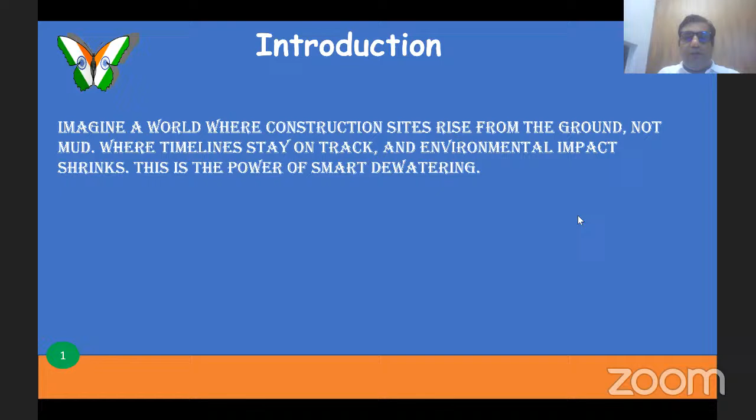With smart dewatering, less water worries translate to more peace of mind. This is the main crux of the dewatering concept. Imagine a world where construction sites rise from the ground, not mud, where timelines stay on track and environmental impact shrinks. This is the power of smart dewatering. Aligning with the words of our Honorable Chairman IEI Faridabad, smart dewatering is very much important for all of us. Today, this session is organized by IEI Faridabad in association with IEI Kolkata.

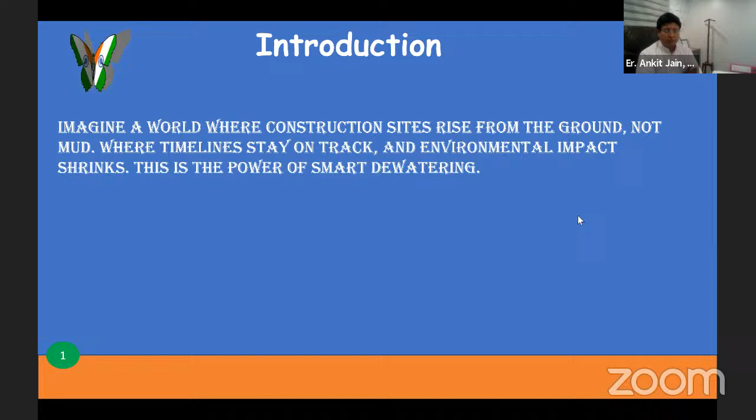Our today's speaker is Mr. Ankit Jain. He is the CEO of Cosmos, a renowned brand specializing in dewatering pumps. Holding a BTech in mechanical engineering from Jamia, Mr. Jain is a visionary leader in the field of pump manufacturing. His expertise and innovative approach have earned him the title of dewatering guru, driving excellence and technological advancement in the field. Under his guidance, Cosmos Pumps continues to deliver high-quality solutions for water management challenges, not only for the private sector but also for the corporate sectors. He is an associate member of the Institution of Engineers. Sir, Mr. Jain, welcome. Without taking a long time, please continue, sir.

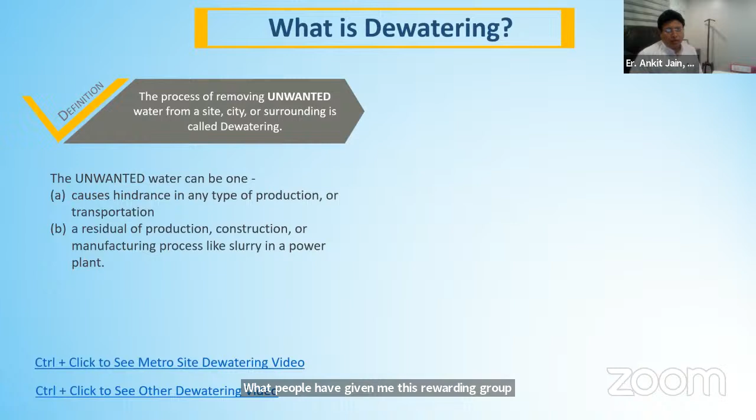So I'll straightforward come to the subject. What is dewatering?

If you read the definition, it's the process of removing any unwanted water from any site, from a city, from surroundings - dewatering. Notice the word unwanted. So we have to remove the unwanted water. Unwanted water can be a cause of hindrance to your production, to your transportation. It can be a residual of your production or construction or manufacturing process, like slurries in a power plant. So whenever there is any unwanted water, we have to remove it, and that activity is known as dewatering.

I have some small videos with me, which would give you a fair idea of what dewatering is and how it is being done in various applications. So I'll play a video for you, then I'll switch over to my presentation again.

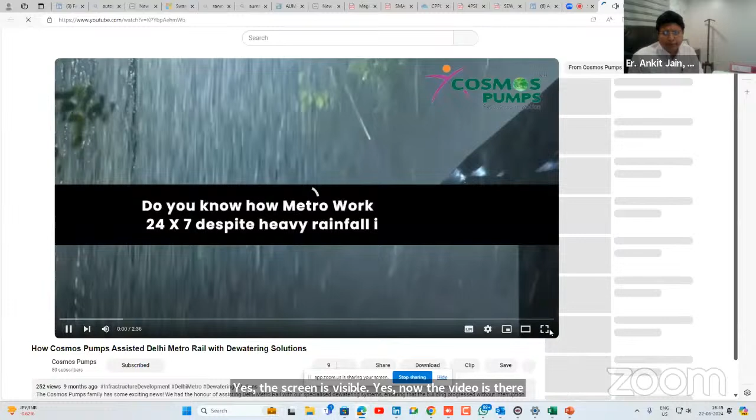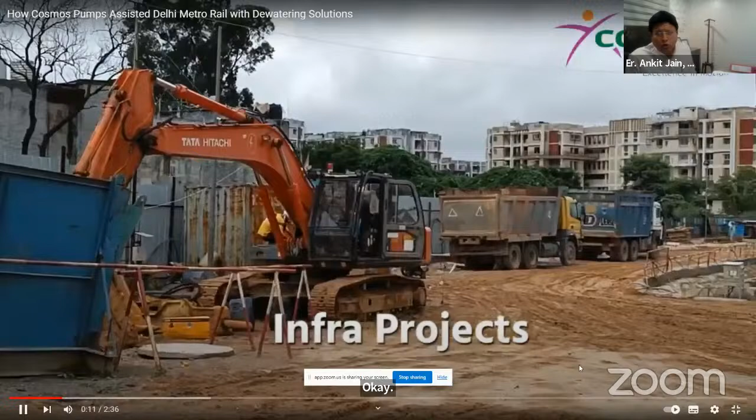My screen is visible to you now. Yes, the screen is visible now. Yes, now the video is there. Is the audio also audible? No, the audio is not coming, sir. Audio is not coming.

Share it. Okay, now it will be done. You can proceed without video, sir. At least we can go ahead.

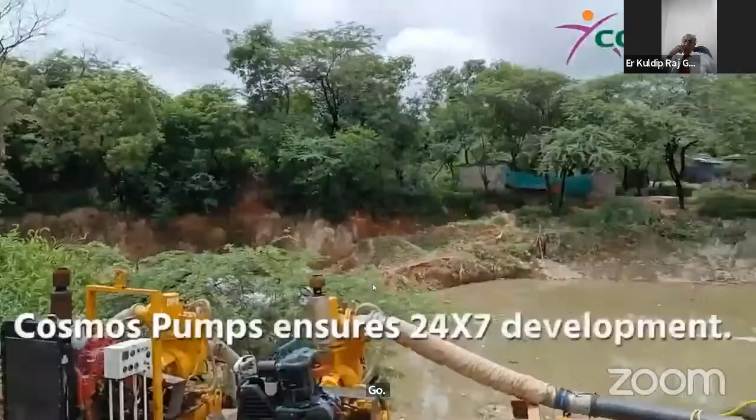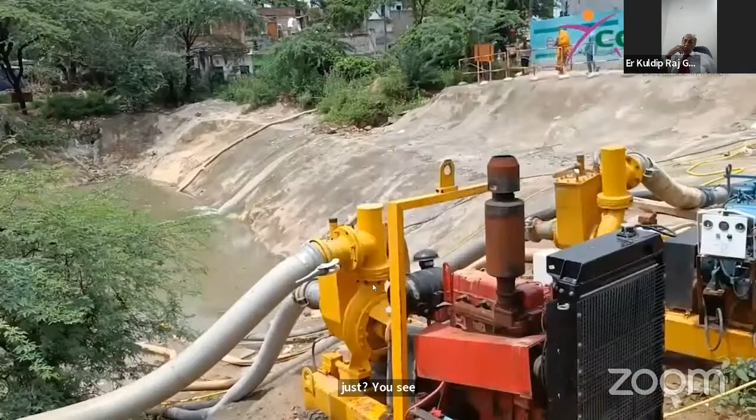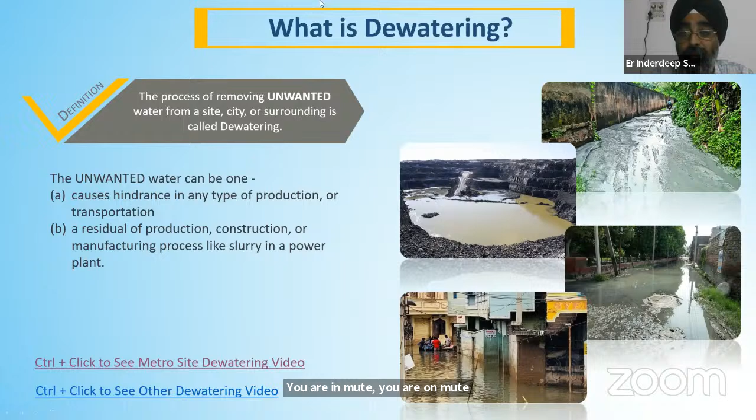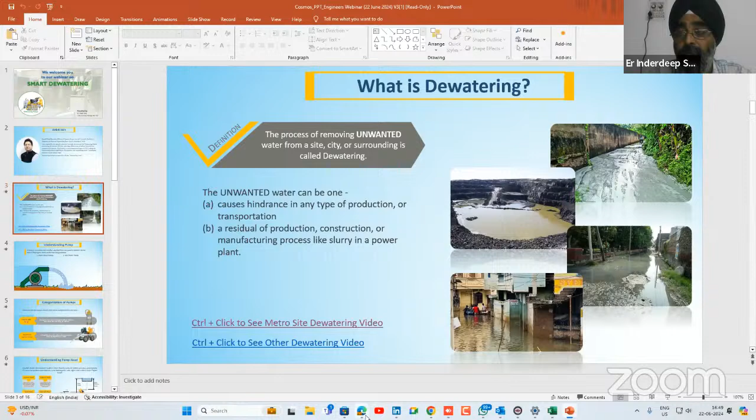You are on mute. You are on mute. Please enable your audio, sir. Yes, now your audio is okay. You can continue, sir. Okay. Yes.

So that was the video which showed how dewatering is being done on any construction site. That was the real video of the Delhi Metro construction site, which is undergoing even today itself.

These kinds of dewaterings are required not only at infra sites but also at mining sites. You can see the photograph. Dewatering is required during monsoon by municipality people, by local bodies, and by various other municipal organizations for their respective regions.

Once we understand what dewatering is, we have to understand the pump. As engineers, we know that a pump is a machine which transfers fluid from one place to another. Since water is also a fluid, we require a pump for transferring it, and that pump is the dewatering pump.

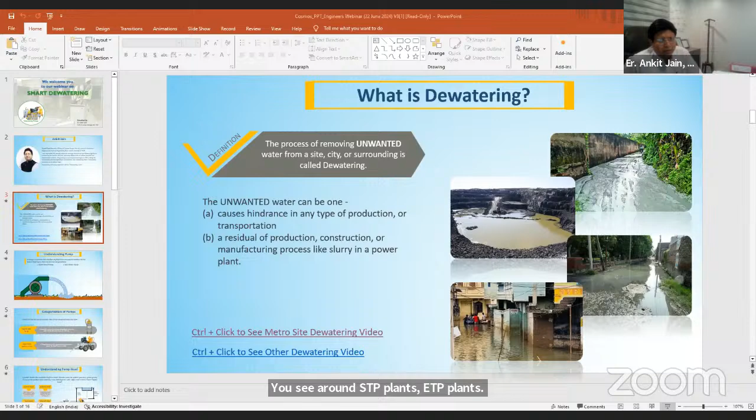You see around STP plants, ETP plants, sludge pumps, sewage pumps—they come under the category of dewatering pumps only. All municipalities, as I've already told you, any under bridges during the monsoon—everybody must have faced that during the monsoons there is a big blockage on the road because of huge water logging.

Municipalities have various other applications too, like manhole cleaning, like nala cleaning. They also use dewatering pumps there. Flood control is a big challenge for everybody.

This is a real photograph, captured 3 years back. If you know the area in Delhi, it is Badarpur, where every time you pass through this underpass, in a 2 hour rain, this underpass is full of water. So every time the local municipal people call us, and we do emergency dewatering for them.

This year we hope they should not call us—they have planned something in advance.

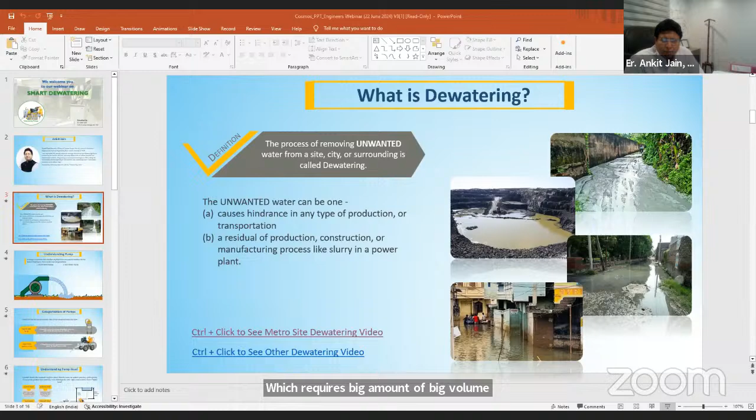The other application you can see is mining and quarry, which requires a big volume of dewatering pumps, because as you go lower while doing excavation, the head increases. Even in coal mines, the head is almost 200 plus meters.

Many of you might have seen the movie Raniganj with Akshay Kumar. In that movie, we saw that a big disaster happened just because they could not control the water. I could see that a lot of dewatering pumps Akshay Kumar was using to evacuate the water, but the challenge was they didn't install sufficient dewatering pumps to control the water, and that big mishap happened so many years back.

Even today, dewatering is a big challenge for coal mines and other open cast mines also, because if you are doing excavation, water comes from the ground and you have to keep removing the water so that the mining activity continues.

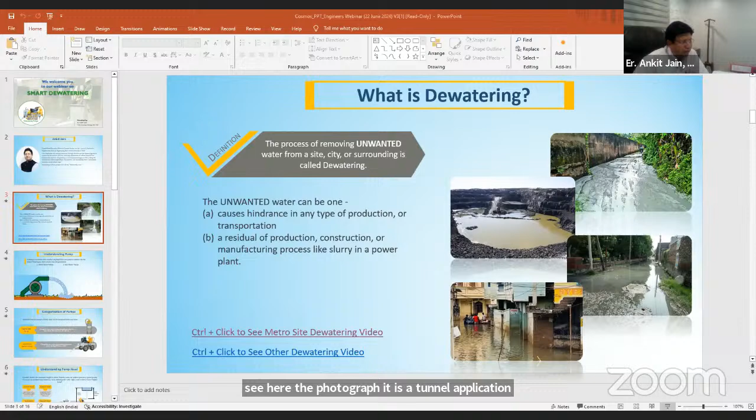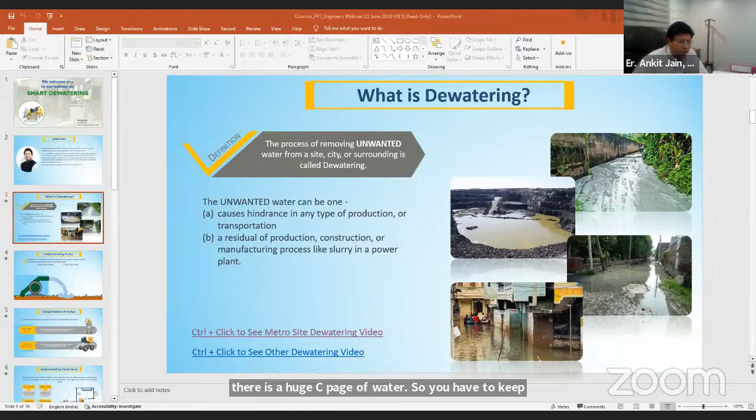Again, hydropower - you have a lot of tunnels, you have barrages, you have powerhouses where there is a huge seepage of water, so you have to continuously use dewatering pumps. NHPC is a big buyer of dewatering pumps from us and from other players globally.

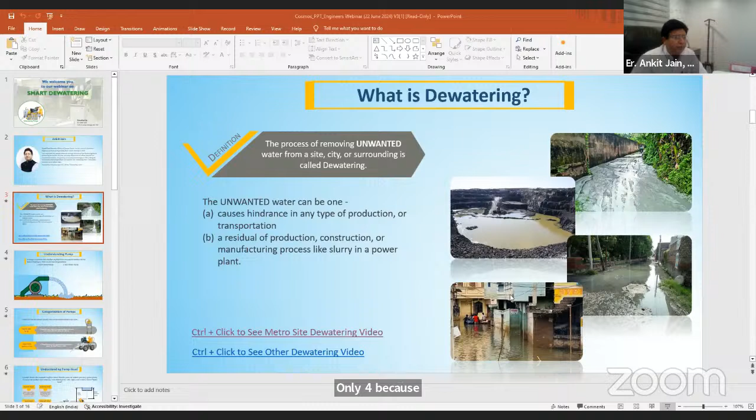Your slide is not moving. Only this slide is showing. This slide is having all the pictures - I hope all pictures are available. Only four are visible, sir, out of eight. We were stuck on slide number 3, but I think you are running slide number 8. The system was stuck on slide 3. Now it is okay, I believe. Yes, now it is okay. That is the challenge with the technology.

No problem, I'll just quickly review what I said. The first application, STP, ETPs - everywhere you have seen the plants, they use sludge pumps and sewage pumps in their plants. These come under dewatering pumps only. Municipalities use dewatering pumps for manhole cleaning, drain cleaning, and nala cleaning. Flood control is a big application where you require dewatering pumps to remove the water logging problem.

Mining and quarry is a big application. As you excavate, there is a huge water seepage and you have to keep removing that water. During the monsoon season also, water accumulates on the low-lying mining areas and you have to remove it so that the mining activity continues. Tunneling, as I said, is a big user of dewatering pumps.

You have used road tunnels and railway tunnels. During the construction phase, they do the excavation of the tunnel and there is a huge seepage of water, and you have to keep removing that seepage using dewatering pumps so that your construction continues. Even today, most of us are from cities only - if you see any metro work around you, which is underground metro work, tunneling work cannot be imagined without dewatering pumps, because whenever you excavate or bore the tunnels, water seepage is a big problem, and you have to keep removing the water using the dewatering pump. Only then can this tunnel boring application succeed.

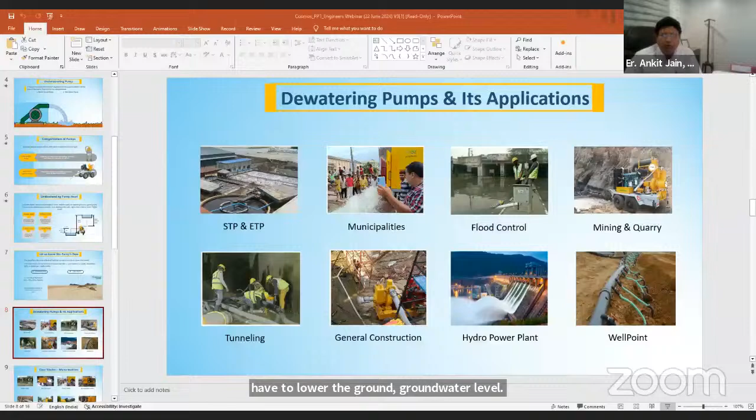So what you have to do is lower the groundwater level. For lowering the groundwater level during the construction phase or afterwards, you put a lot of suction points into the earth, and the common suction point goes to the pump, and through that common suction point you lower the water table, and when you lower the water table, your excavation activity can happen. So this well point application is a very big application for dewatering pumps, and these are the major applications where it is being used.

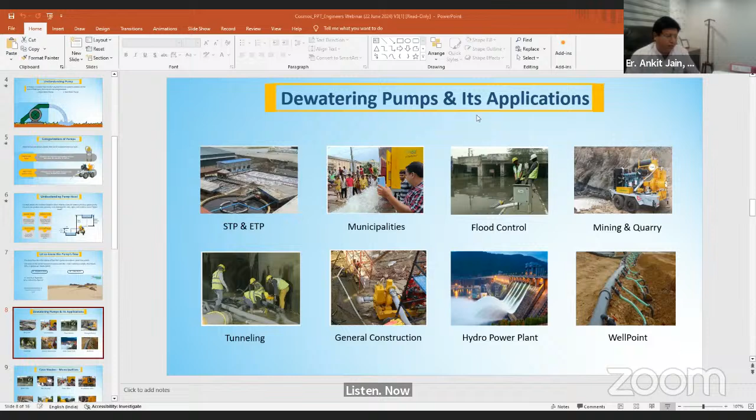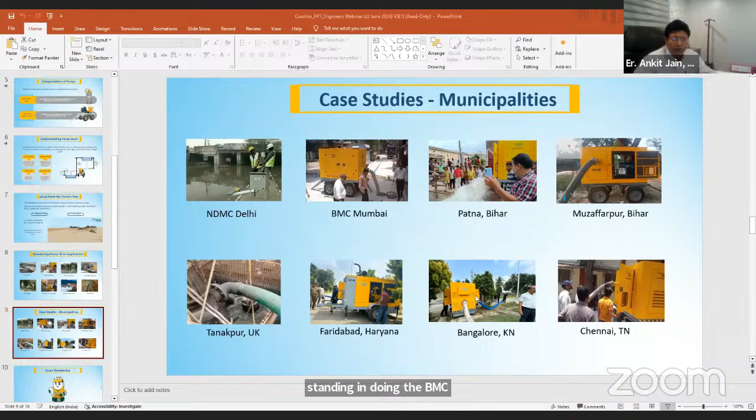These are some of the case studies because in general we know that we face dewatering as a challenge in monsoon. These are some of the areas across India we have supplied to various municipalities - NDMC is a user. You will find Cosmos Pumps standing and doing dewatering during monsoon. BMC Mumbai, Patna, Muzaffarpur, Uttarakhand, Faridabad is also a user, as well as Bangalore and Chennai. So these pumps are going pan India to all municipalities.

Now that you have understood the pump and the dewatering, we come straightforward to the subject, which is smart dewatering. Dewatering is something known to us, known to the department people since a long time. But where we are lagging is that we are still using conventional dewatering, and we do not know what is smart dewatering.

Through our various marketing channels and customer interactions - last week also we were in Jammu Kashmir, and we had a big technical seminar with their irrigation and flood control, their drainage department, and Srinagar municipalities. Almost 200 people attended that seminar, and we are trying to bring the change that now authorities should be aware about smart dewatering.

So when we talk about this smart dewatering, the first thing is priming.

In surface pumps, whenever we use surface pumps for dewatering application, there is a huge challenge of priming. Priming is simply preparing or getting something ready for operations. We also know that during our household activities, in the pump we use to pump water to the overhead tank, sometimes we face the problem of priming - it has taken the air, then you open up the nozzle, then you put the water through the funnel.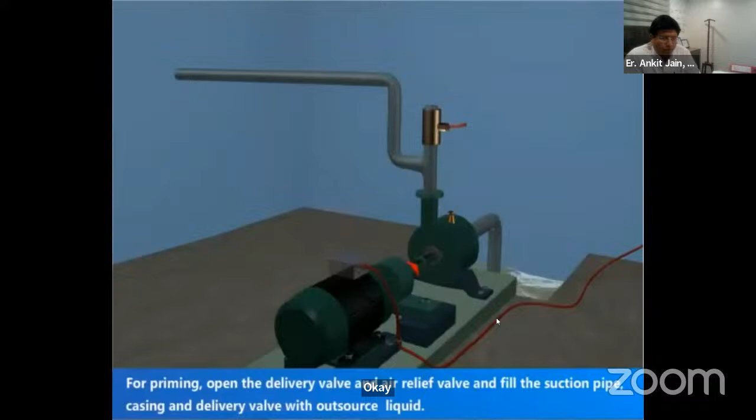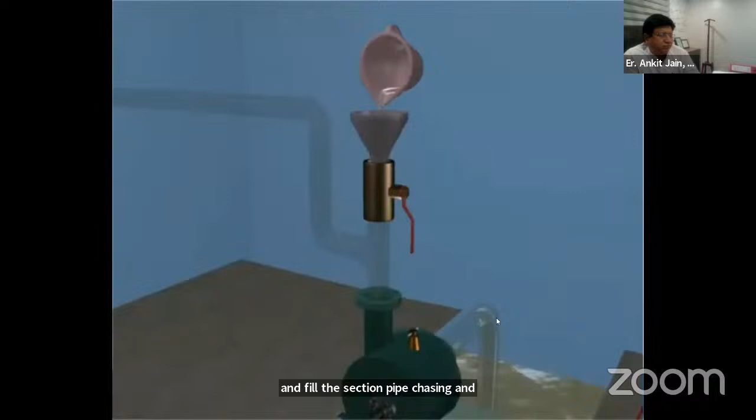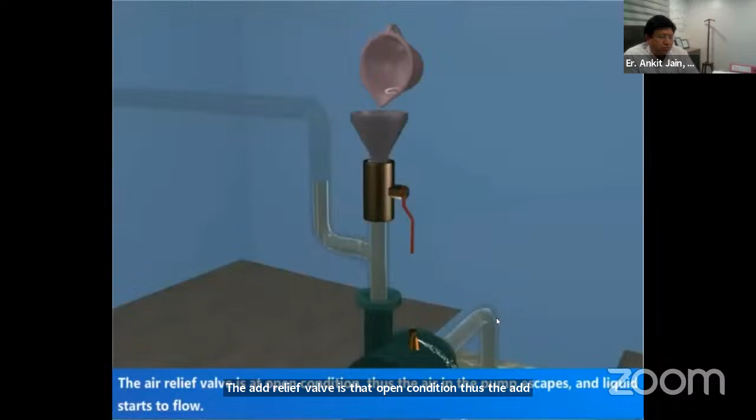For priming, open the delivery valve and air relief valve and fill the suction pipe, casing, and delivery valves with outsourced liquid. The air relief valve is at open condition, thus the air in the pump escapes and liquid starts to flow. Now close the air relief valve and delivery valve. The priming is done on the centrifugal pump.

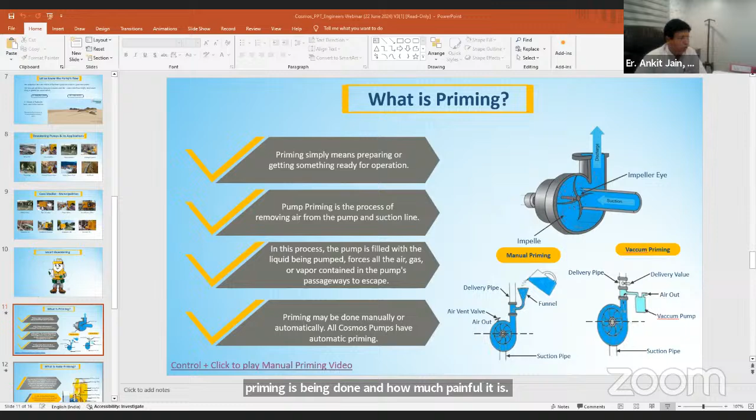To remove that pain, we have a solution which is auto priming. Using this technique, because the air sucked in the suction line is troublesome for removing the water, here we are using a vacuum system, a priming system. We are removing that air automatically from the suction line, and the pump will keep on pumping the water without any disturbance, without any delay.

We have seen practically at various municipal locations, at various municipalities, at various construction sites, that dewatering was taking 8 hours. When we gave the demo, when they used our pump, that dewatering was actually happening in 1 hour, in less than 2 hours.

So one can understand that when you switch over to the smart technique, a lot of resources, a lot of efforts can be saved, and moreover, you are giving a good life to the people who are troubled because of delayed dewatering. You are giving more production time to your mines. You are consuming less time for the same construction.

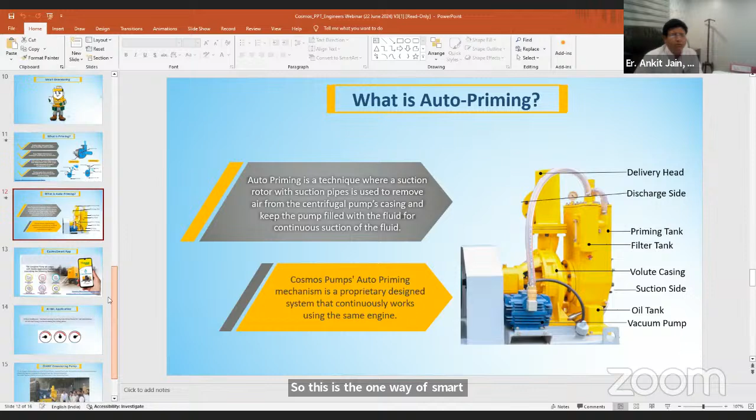So this is one way of smart dewatering that we are using. Another way of smart dewatering that we have is the Cosmos Smart app.

Using this app, we are offering all our users a remote check on their pump and remote monitoring of their pumps. They can check whether the pump has reached the location. They can check the real-time location. They can have real-time running data. They will have all the data for the last 6 months about the pump record.

They will have real-time fuel consumption information. Say if the pump is running for 2 hours, how much fuel is being consumed, a curve is plotted on the app. During the running phase, this amount of fuel is being consumed, and in this manner my curve will show every bit of it. The best part, my app gives all alerts if there is a fuel theft.

Fuel theft is a big trouble for municipalities, for construction site people, for any kind of user. So with this app, they are avoiding all kinds of fuel theft. They are getting all information on refueling, and the best part is, since when you operate pumps, there are a lot of intervals for services to be done, planned services in a planned manner.

So that your pump does not fail at the actual moment when it is required. So with the app, you get all these service alerts, so that you can timely service your pump and timely remove the water.

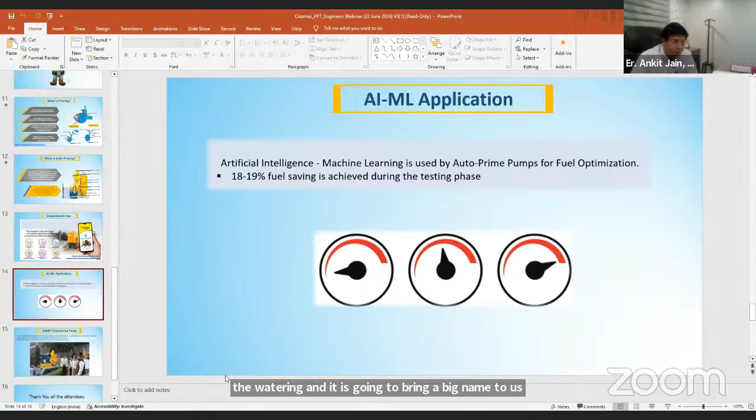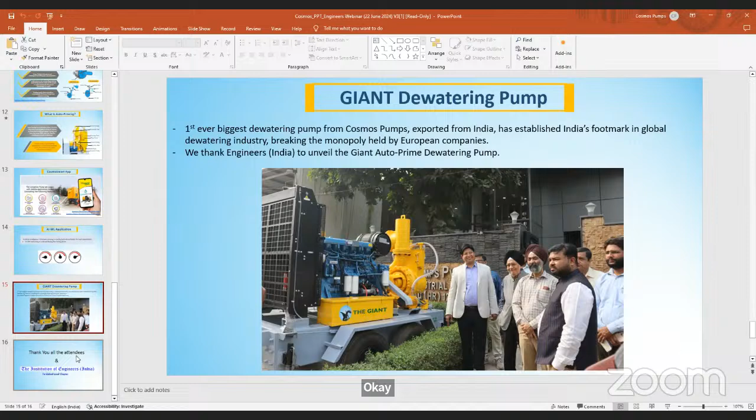Inderjeet ji, I would be happy to tell you that after this pump, we have dispatched almost 20 more pumps to the same customer. This pump is a huge success there. Trust me when I say this - this industry was originally captured by US and European players, but now we have broken their monopoly, and as an Indian manufacturer, it is bringing a big and good name not only to us but to the country. I would like to thank all the attendees and the Institution of Engineers for giving us this opportunity to present this presentation to you.

I can take all the questions if you have, or I will play a small video if Inderjit sir allows, or if time allows me.

Rajendra ji, please suggest me if I can play a 2-minute video or should I take questions? Yes, you can play it, sir. No problem, we have time. Okay, okay, okay.

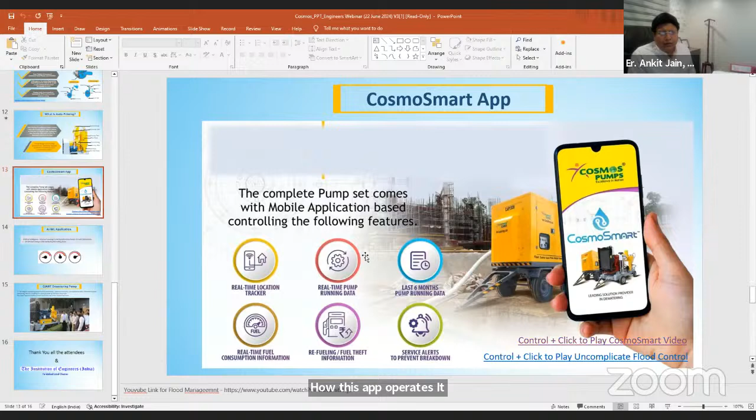How this app operates, it will give you a fair idea. Let me just screen share.

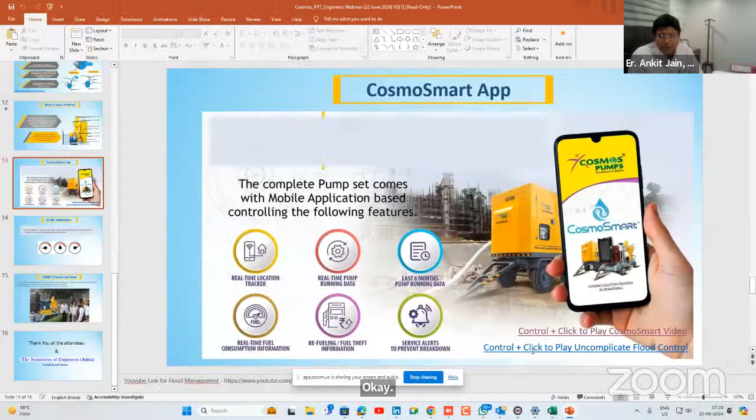CosmoSmart is a mobile app used to monitor Cosmos auto prime pumps at the comfort of your office. It is very user-friendly and gives remote pump data-driven insights and timely alerts, resulting in efficiency and cost savings in dewatering operations. Once you install the application, log into your app using your username and password. After you log in, you are taken to the dashboard, which shows the status of all dewatering pumps connected with the app. The dashboard shows the total count of pumps, pumps running, pumps idle, pumps stopped, and pumps unreachable. There is a button for live tracking of pump locations. Tapping 'all' shows the status of all pumps with serial number, location, status, and tank capacity. Tapping 'running' shows data of all running pumps. Tapping 'idle' shows data of pumps in idle condition. Tapping 'stop' shows data of pumps in stop position. Tapping 'unreachable' shows data of pumps not reachable, disconnected from the system.

When you click on live tracking, it shows the geographical location of pumps on the world map. When you click on the icon, it tells the pump number. You can scroll down to see the running status of the pump.

The other features of the app can be accessed by clicking on the hamburger menu, which helps you track your individual pump, access reports, and other general features. Track your pumps: this feature allows you to track the location of a pump by its serial number.